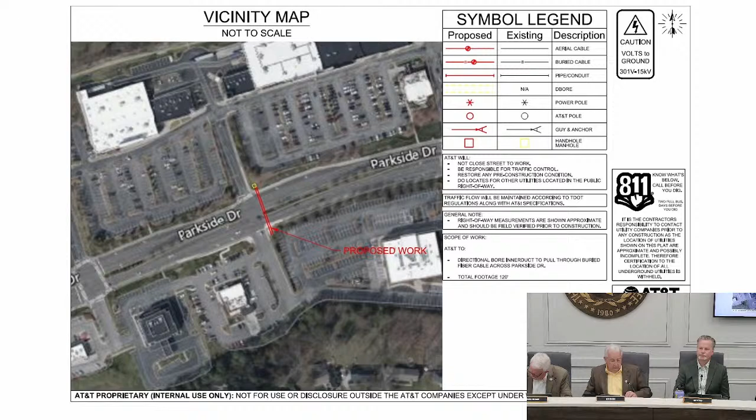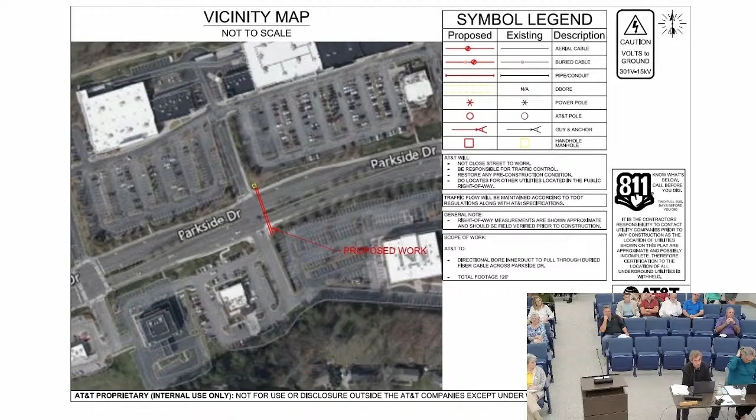Yes, this item involves fiber cable being installed actually under Parkside Drive from the north to the south side. This would service the Turkey Creek Medical Center. This work will be conducted with directional boring. The installer does have a bond with the town to ensure that any damaged areas are restored. This is for AT&T to be able to provide service to the medical facility. The staff recommends approval of this right-of-way request, subject to obtaining a right-of-way permit from the town's engineering department.

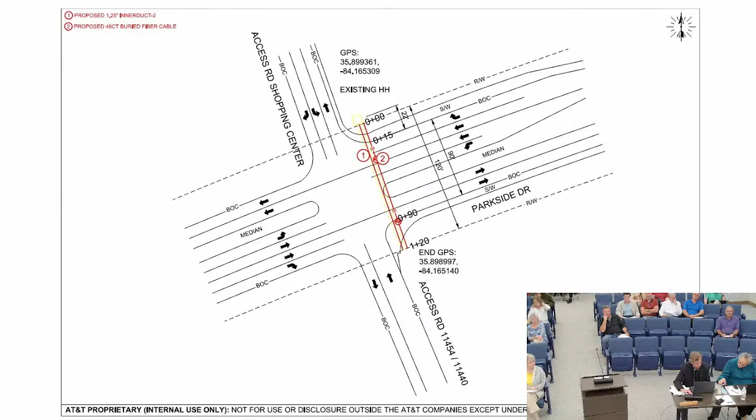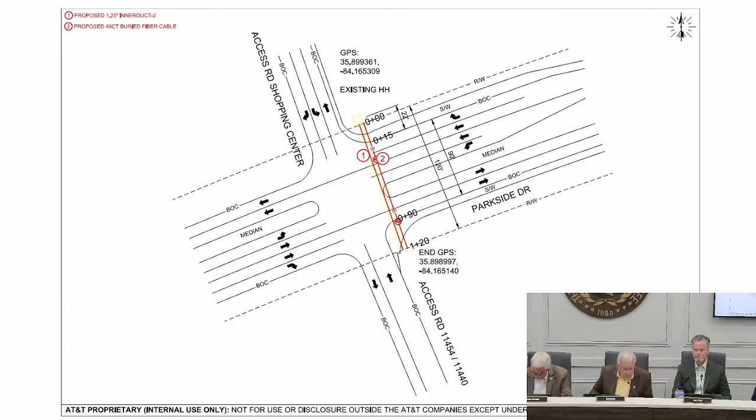Motion to approve. Second. Okay. Do we have someone from AT&T here, representative? They may not have anyone. I told them it was probably pretty straightforward since it's just one section of bore, so. Okay. Are there any citizens signed up? No, sir. Okay. Commissioners, are there any comments or questions? None? None. All right, we're ready to vote. All in favor of the motion, say yes. Yes. Opposed? No?

All righty. Motion passes. Next item on the agenda, item 4B, discussion of public hearing on a resolution PC 25-5, to amend the Farragut Municipal Code Appendix B subdivisions, Article 3, subsection A, streets, to provide for context-sensitive street cross-section requirements as illustrated in a new appendix to the subdivision regulations, referenced as Appendix F, in lieu of existing requirements to the subdivision regulations. Town of Farragut applicant.

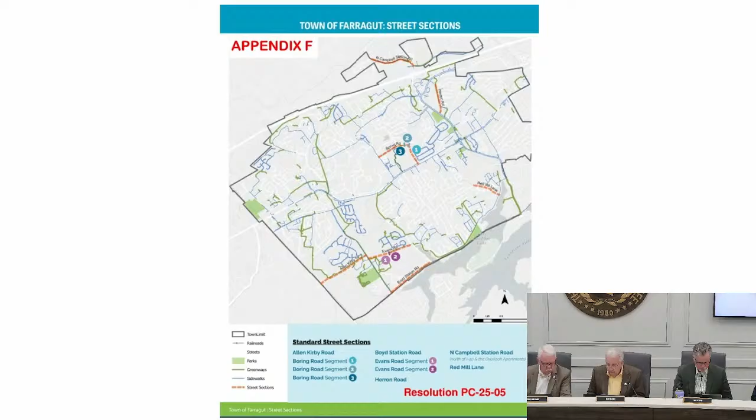Sorry. This was discussed at two previous planning commission meetings. It involves an amendment to the subdivision regulations as those regulations would otherwise apply to certain streets that are being identified in a new appendix that would be part of the subdivision regulations. We have a number of appendixes that are associated with the subdivision regulations. So these cross-sections would be Appendix F as part of Resolution PC-25-05.

So just to give you a little background, in the subdivision regulations, Article 3 is the section that deals with the requirements for public improvements. There's a subsection for streets in that section, and that provides for the different road classifications that are on our major road plan. That section provides for what the required right-of-way width would be, the street widths, how the drainage would occur along the streets, and other design-related requirements.

There's also the requirement that we put in the ordinance a few years ago to comply with the town's pedestrian and bicycle plan, and that's basically trying to provide for all users of the transportation system, not just motorists, but also pedestrians and bicyclists.

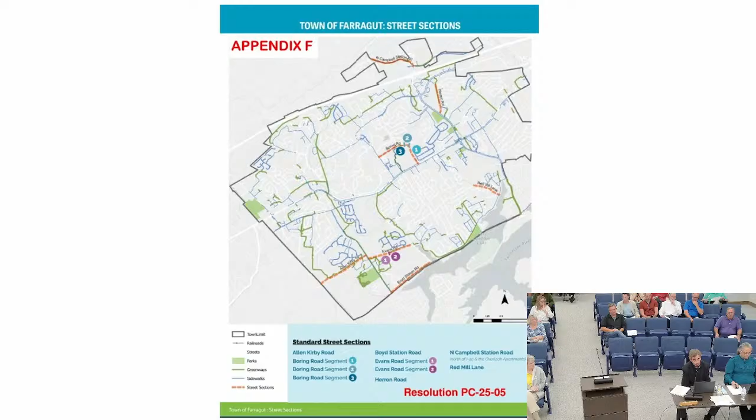So again, we don't have any road projects on any of these streets. I just want to be clear about that, because I think there's been some misinformation or misunderstanding. All this is just looking at what we have. Is there a more context-sensitive way to get an improvement that would benefit, really, frankly, the people that live on these corridors?

So I'm just going to go through. These slides were included in the packet, but I think they really demonstrate visually what we're trying to do versus what would be otherwise required. And I'm just going to go through the streets that are in this appendix. The first one's Allen Kirby Road. If you look on the left, that's the context-sensitive cross-section that's part of this resolution. That's what we would be looking at.

That is the same cross-section that Bridgemore's concept plan was based on, other than the open drainage, I think, is something that we're proposing in this case. Again, trying to keep more green space and less hard surfaces, less curb and gutter, where we can avoid curb and gutter, more grass strips and things like that.

So if you look at that on the left, that's proposed; on the right, for a major collector street, which is what Allen Kirby is on the major road plan, that's what would be required if we don't adopt this resolution, and that road gets approved, and we have to go by the requirements that we have on the books right now. So that's two 12-foot lanes, curb and gutter, and a shared use path or sidewalk on both sides of the road.

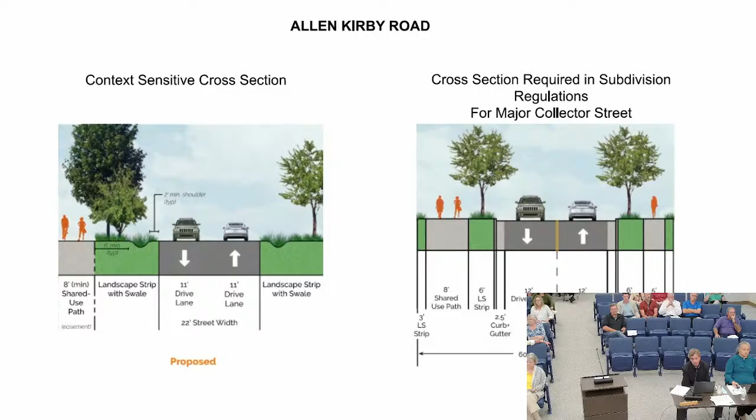Second road is Boring. Now, Boring Road is a little bit different than some of the others because obviously it's in transition and there's potential plans to do the school part of it. But should that road ever be improved, what we're looking at on the non-school portion of the frontage is going to two 10-foot lanes and a shared use path on one side with a landscape strip on both sides of the road. Let me pull that up here.

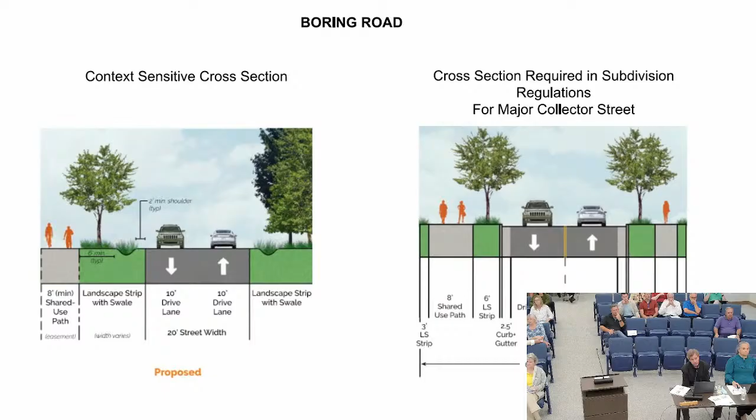Boring Road is another major collector street. On the left is the context-sensitive cross-section that's part of this resolution. That's two 10-foot lanes, open ditch drainage, and a shared use path on one side of the road. Now, when you get into the details of a road design project, it's shown maybe on one side of the road in this resolution, but those things can get changed during the more detailed design plan process.

I mean, that's happened on Virtue Road. Originally, we felt like the trail for Phase 2 of Virtue Road would be on the west side of Virtue Road, but after looking at the topography and doing more surveying and engineering, we figured out that maybe a boardwalk on the east side makes more sense. So those are things that could come up when you get to a more detailed design plan set. We don't have any of that right now and won't have it for years.

But this is, again, just the starting point for what the expectations would be versus what would otherwise be required. So that's what we have on Boring Road, the difference there you can see. That would be required to have, again, the two 12-foot lanes, curb and gutter, and a shared use path or sidewalk on both sides.

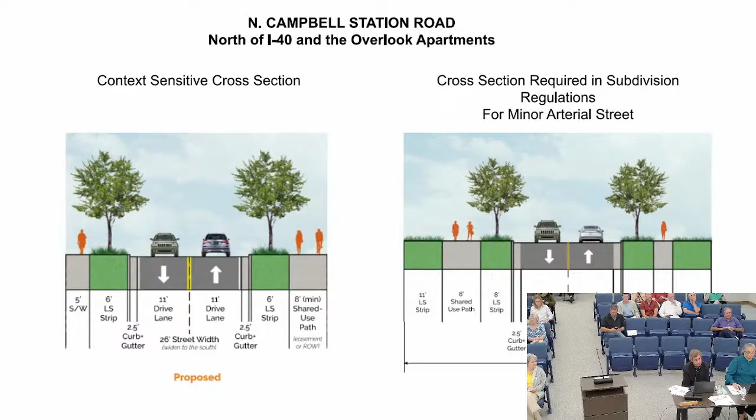And then finally, Red Mill Lane is a minor collector. And that section of road was identified as a potential candidate for a pedestrian facility because you have all the Kingsgate, Turkey Creek Woods, all those developments to the north. And the only way to get down to Turkey Creek Road and Anchor Park is to get in your car. Nobody's going to feel safe walking along Red Mill Lane or Herron Road. So that's why we looked at those two streets as potential candidates someday for some kind of pedestrian facility on one side of the road.

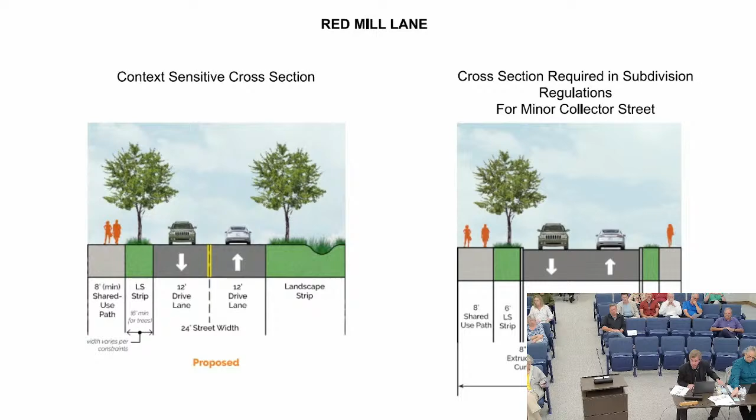I need a motion. So moved. We have a motion and a second. Okay, public? Anybody from the citizens? I do have some people that have signed up. Yes, sir. Okay. Let's see, the first one is Jim Roberts. And after Jim is Donna and Mike Pyle. And these are three minutes, so just so you're aware.

Okay, is your mic on? Is your mic on? Push the green button. The green button on the right. Okay, I can't see that. Thank you.

Anyway, my name's Jim Roberts, and I was concerned about what I'd heard on Herron Road. I live on Herron Road. And I thought it was closer to some decision was going to be made tonight. And from what I've seen, if I hadn't signed up, I wouldn't be down here right now. So anyway, as it gets closer, I'm sure we'll be listening and I'll be listening. And if I think you need my input, I'll tell you then. But right now, everything's fine. Thank you. Yes, sir. Who's next?

I have Donna and Mike Pyle. Just one, okay. Hey, Mike Pyle. I live on Herron Road, beside Mr. Roberts. I hope he didn't leave on me. The concept I understand, wanting to change it to one side of the road instead of both. Both would be very expensive and really hard to do. You move it to the west side, you're going to have to move all the utilities. I'd like to see the impact on the cost to do either one, and the feasibility of even doing it.

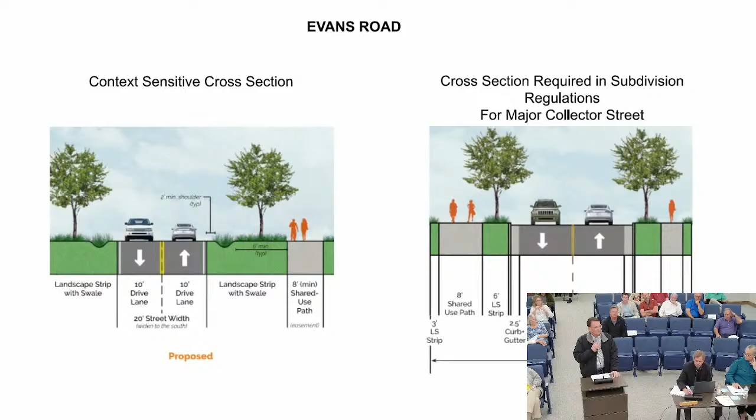You know, there's people here from Herron Road and Allen Kirby. I'm not gonna speak for them. You know, if they're happy with what you got, I'm fine. I'm not asking you to speak for them. Go ahead, Mr. Mayor. Did you hear what she said? She asked you if you wanted to remove Evans from the conversation and leave everybody else in. Okay, that's what she's asking you right here. It's not whether what they did, not that, okay?

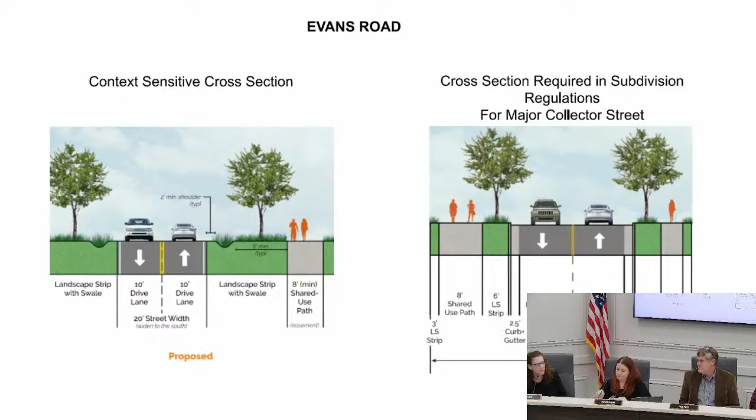Yes, Mr. Mayor, there's a process in place to resolve all these controversies, to bring it to conclusion. I really hope that when you have this conversation, the conspiracy theories, the what-ifs, the coulds, we could fast-track this, we're here trying to do what's good for this community. We're trying to reduce the impact and preserve the rural character of this road. And all we're getting from social media is that we're trying to screw the people on Evans Road. We're trying to hurt Evans Road.

And I'm looking at this and I'm thinking, what we have in place right now is utterly destructive and that's what would have happened on Union Road. And I fought so hard for Union Road to get to a place where we can get to a place for the rest of our community and not do McFee Road on Evans Road, not do McFee Road on Allen Kirby. We see the result of McFee Road. We've seen what it's done for the people who try to walk on McFee Road and they feel like they're on a racetrack. That road design is, I'll go into it later, but we're trying to have an honest conversation.

We're residents too. We live here too. We're not trying to do something underhanded or behind the scenes, we're just trying to make things better in an area where the road is substandard. It needs to meet engineering designs, engineering standards. There's certain things that are non-negotiable.

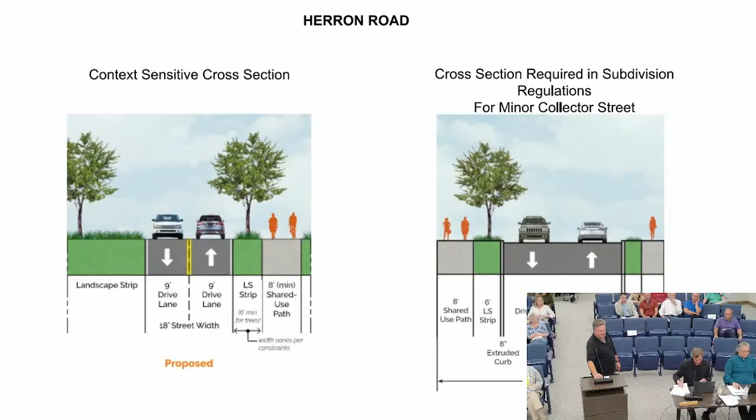That's what Louise has been battling for years, and we used to call this road diets. Is, hey, why do we have to do it this way? Just because there's a TDOT manual out there that says do it this way? Yeah, are there other ways to safely move the traffic from point A to point B and get our pedestrian connections? That's what I was gonna talk about.

Sorry, did I steal your thunder? Yeah, I stole her thunder. Go ahead. Mark, is that everybody? All right, Louise, you've got the floor.

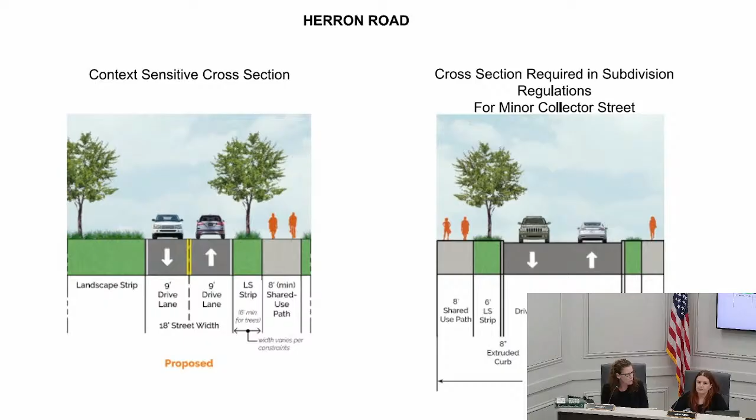I appreciate that. So, as many of you know, this is something that I've been working on. Union Road was an eye-opener. When we got funding for Union Road, I had several citizens come up to me and beg me, we do not want Everett Road on Union Road. And I didn't want Everett Road on Union Road. The Everett Road design was over, I couldn't imagine what that would do to Union Road.

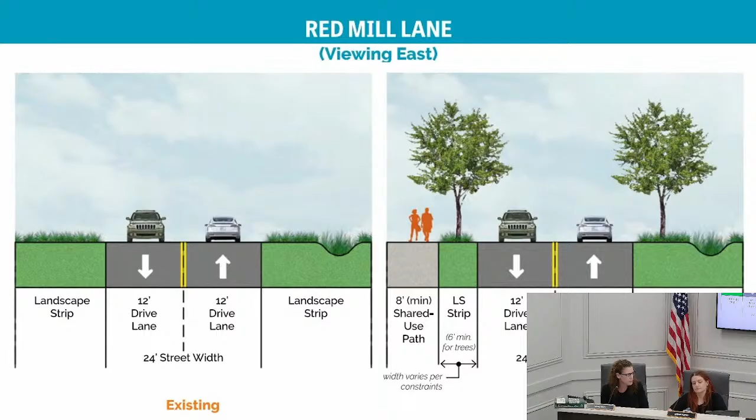Union Road, if anyone's not aware, is an old farm road. It used to be a dirt road, and they simply paved it. There's no design, there's no engineering, and it's in desperate need of being replaced, but we didn't need to do what we've done on Everett Road. So obviously, at the time, we had funding, and I kept hearing from the engineers, we have funding, we have to do 12-foot lanes and 40-mile-per-hour design speed. And I'm like, I'm sorry, I'm not.

So I started to dig in. And I had an education. I had to get educated. And then I had to educate the residents. And then I needed the residents to help me, which was where Vice Mayor Myers stepped in. So let me give you the background of why we're here today and what we're doing today. And I apologize for you guys that are waiting, but you'll get an education on stuff.

Decades ago, when transportation engineers were establishing design parameters for the interstate transportation system, our highway network, they had to consider high-speed travel, safety, and efficiency. The design parameters they adopted included establishing a design speed higher than the intended speed of travel. To make sure sight distances were sufficient, they needed sufficient lane width to allow for some degree of driver error and correction without getting in an accident.

The engineers did this so well, they thought it would be good to extend that design philosophy to local road design. For decades, this philosophy is what drove road design for our community's collectors and arterials. At some point in the mid-90s, the wisdom of applying the highway design to local roads began to be questioned. Context-sensitive design was first introduced in the early 2000s, but the transportation engineering industry was slow to adopt it.

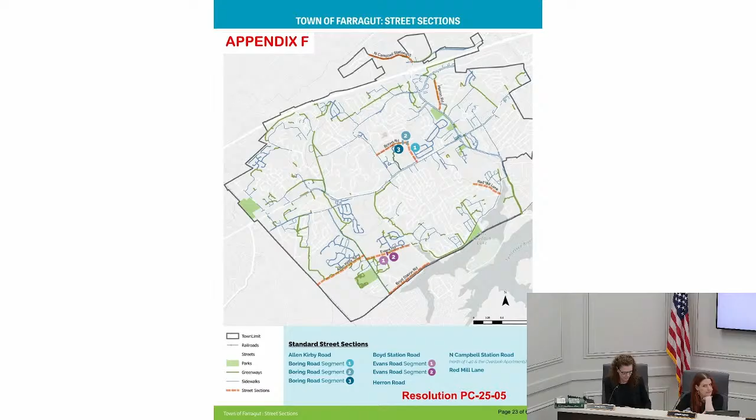Yeah, one more. Chester Carball. Oh, wait. Glad to see you all.

Chester Carball, 12401 Butternut Circle, live in Sugarwood. I've lived in Farragut since 2003. I'm grateful that you're considering something like this. I've been in construction all my life, before I moved to Farragut and afterwards. I've always wondered why the streets were built like they were, with curb and gutter and as wide as they were, when we've got large sections of Kingston Pike that don't even have a curb and gutter.

So I'm here to give you the voice of thank you, because this will really help. I think you can do 3 projects for the price of what you're paying for one of the ones you're doing right now. And I know we like to think that the state always has the best guidelines, but in my opinion, you're taking your independence back and doing what needs to be done for the town itself. Thank you. Thank you, Chet.

All right. We've got a motion. We got a second. We've heard from the citizens. Are there any other comments or questions from the commissioners? All right, if not, time to vote. All in favor of the motion, say yes. Yes. Opposed? Okay, I believe the motion passed unanimously.

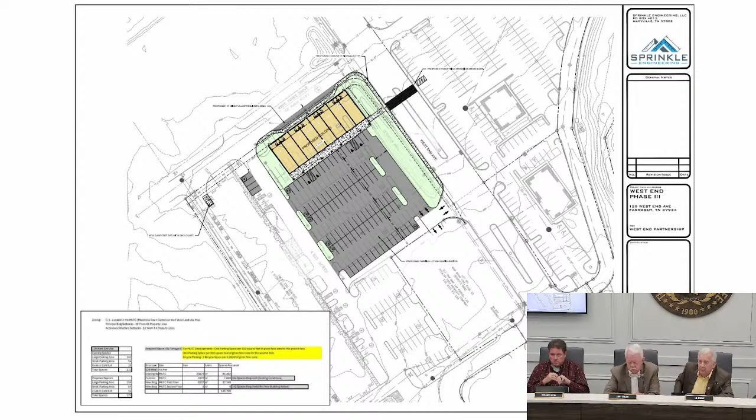Well, I'll just, Chet, you can come if you want to. Come on up, Chet. Tag team us. I'm Dan Britton, and I'm the architect.

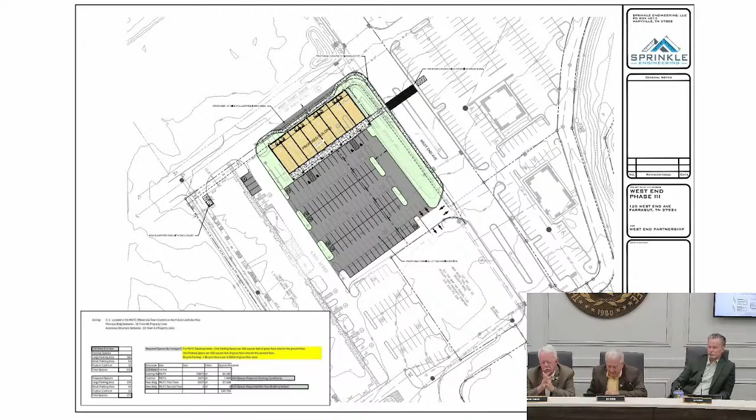So this is red brick that's on there now? Well, the color of the brick would match the existing buildings around to complement what's out there now. Okay, that's good. Now, when you look at the rest of it, what color is that? The colors haven't been set yet, as Mark mentioned, this is very conceptual. If we're trying to match existing, it's reds and browns, it's beiges. If you go up the West End, it's a pretty big center, and there's quite a few different color variations as you go through it.

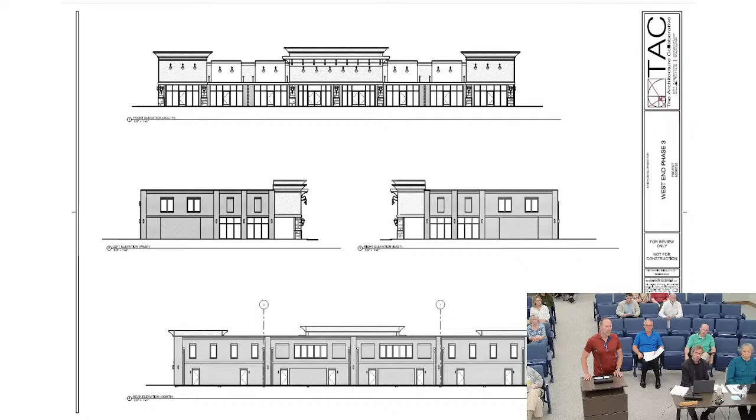I would prefer to do that rather than start changing to where it would affect even future things that may happen on the property that y'all own now, or, like what Luis said, other buildings that at some point in time will be upgraded, and we can't just start changing. So unless somebody else has another opinion, I think you can color brick to match the existing color of the building. In other words, if the bottom part is red and the other part is tan, I would look at possibly matching that color with that color of brick.

I think what the applicant's trying to do tonight is just get our general feedback on the concept. Quite frankly, when I look at your elevations, I don't think you're that far from 75%, because you get to count all four of your elevations. Is that the requirement, 75%? Yeah. And so I think what the applicant's really trying to do, to be in compatibility with the rest of the West End, is say we'd like to use some stucco up on the facades where the signage goes and where you have some of the lighting all the way up to the parapets. Chester, if you guys have done the calculations, you're probably pretty darn close to 75% already.

We've got them per elevation, but we haven't averaged them all, but we'll do that. I think you can average them. I think that we've allowed averaging. I don't think we've required necessarily 75% on every elevation. It's a little bit different: the architectural design guidelines give you the ability to average it in the town center part, but the zoning talks about the face brick being on all the elevations, the 75%. So it probably just needs to be cleaned up. That flexibility would be going by the architectural design guidelines, which is 75% net facade of face brick.

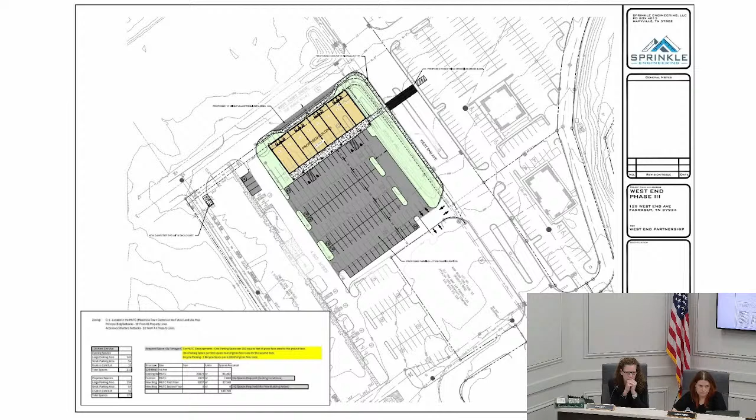And it'd be nice for you guys to be able to have some street presence, or the ability to see some of those businesses back there. I don't know if you're planning on a monument sign. I don't know if it's allowed. Yeah, I mean, actually, they could put monument signage out there, and I guess it maybe hasn't been proposed in the past because it's so far off Kingston Pike, but they definitely have the public streets to do it. They got West Point and West End, so you got potentially two monument signs facing each of those streets.

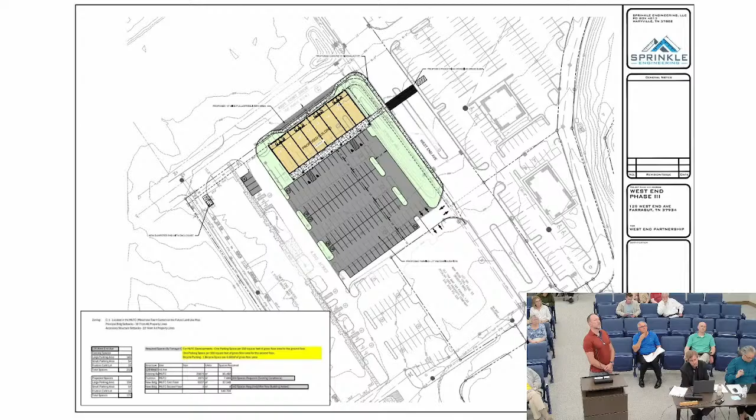Yeah, so your challenge with the monument signs is going to be, you have a bunch of tenants, everybody's going to want their name on it. And so that's going to be hard to keep everybody happy. Yeah, but it's something for you to consider in all of this. Yeah, that probably won't go over too well, really tall. How about a billboard? Pylon sign, billboards. You guys are looking for feedback tonight, so that's what we're trying to provide you.

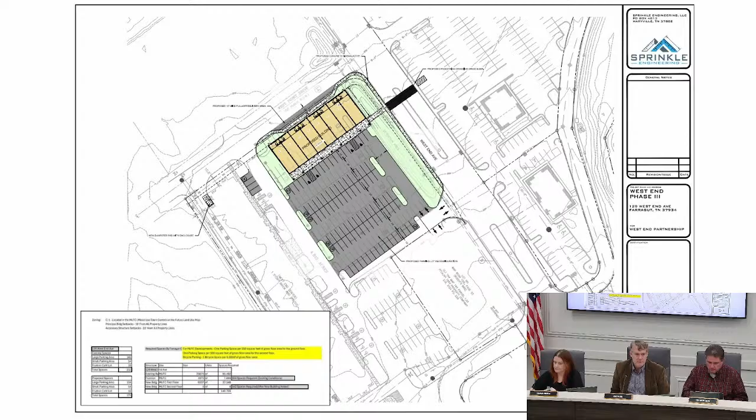Sure. Your rear elevation, I do think it's important for those rear doors to have glazing on them instead of just steel doors. We don't necessarily want it to look like the back of a shopping center, even though I know it'll probably be used that way, and that's okay. So you guys kind of think about that. Your tenants may just end up tinting the windows, which is fine, but you do need to use glass on those rear doors.

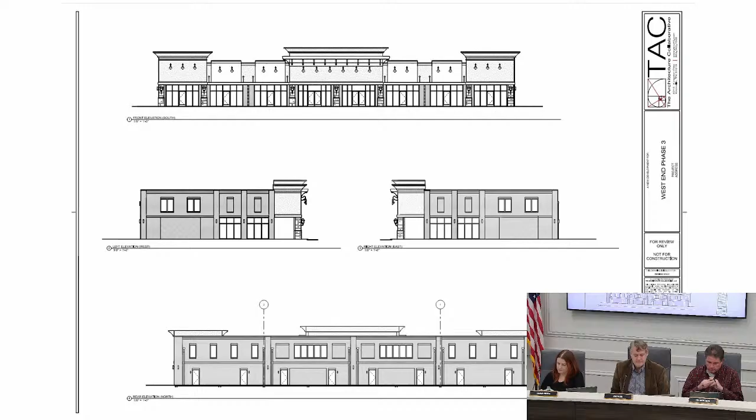Your tough parts with this are going to be your mechanicals, your meter bases, and I guess you can put your condensers on the roof, but trying to make that all look nice. When you're in this kind of downtown environment, it's hard to make all four sides of a building look nice. I've got a question, sir. Is the second story a debt issue? I believe so, yes. Just from a financial standpoint, not speaking for the owner.

Well, I'd love to see a 2-story building. They don't have any in Biddle property, and a nice restaurant with casual dining on the ground floor and better dining on the top floor, or whatever. I think there's a need for two-story buildings that are functional. Ron, the challenge with two-story buildings is the elevators and the fire code's egress. And by the time you dedicate so much space to both ADA and fire code, you end up with a bunch of space that doesn't pay you rent. That's the challenge with multi-story buildings.

As much as we really would like some more multi-story buildings in the town of Farragut, if the market rates aren't there to pay the lease rates that can justify building a really expensive building, then... I think this is a good attempt at least giving us the look and feel of a two-story building. Obviously, we would love a two-story building, and I agree with Ron, but I'm trying to give Ron guidance on why two-story buildings just are not economically feasible yet. Maybe still push for it. If we were in the Gulch in downtown Nashville, getting $70 a square foot in lease rates, maybe you could make two-story buildings work, but we're not there yet. Correct. Thank you.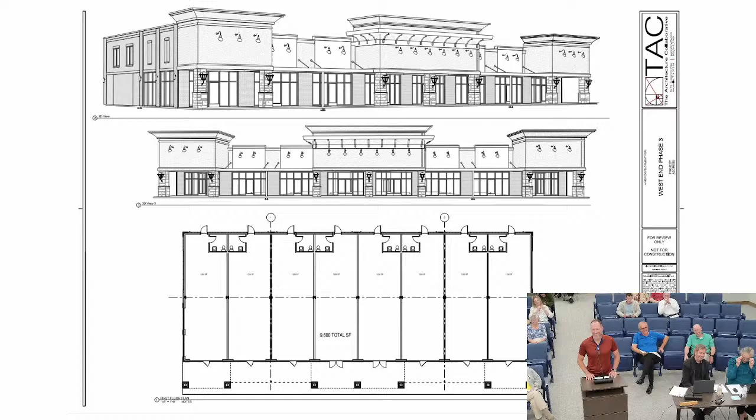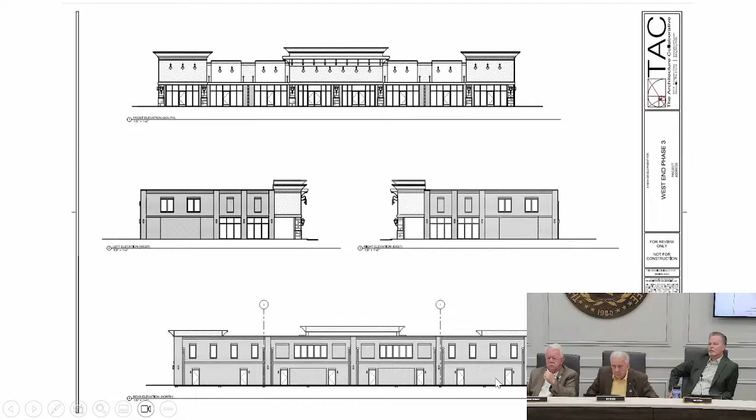Any other questions or comments? I was just going to mention, when we submit again, there'll be a color rendering. You'll see it. From a conceptual standpoint, the brick, if you go to the rear elevation, my understanding was those pilasters and the soldier coursing, you're going to see different colors of brick there. The whole idea is to break it down, make it not look like one big long building. So you're going to do that with different color bricks. Yeah, it's definitely broken up. Thank you. Hey, guys, you've got enough direction now? Okay.

We have no additional utilities. Thank you. Next item, citizens forum. Anybody signed up? I have no one under citizens forum. All right, time's approximately 7:14.